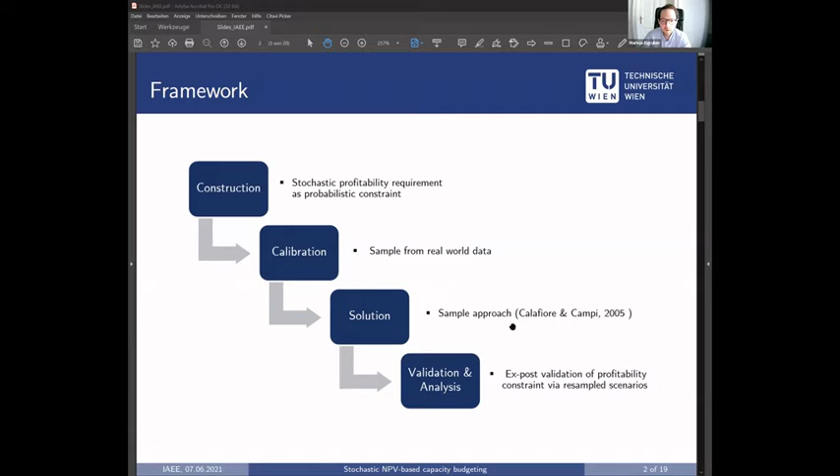So this is basically the outline of the presentation today. It closely follows the sections in the working paper as well. We are firstly constructing the model. We are then calibrating it, using real world data from an airport right close to Vienna. We're then solving the model using a sampling approach and also a constraint discard approach, using results mainly from the work of Calafiore. And in the end, I will also present some first validation of the model that we came up with up to this point.

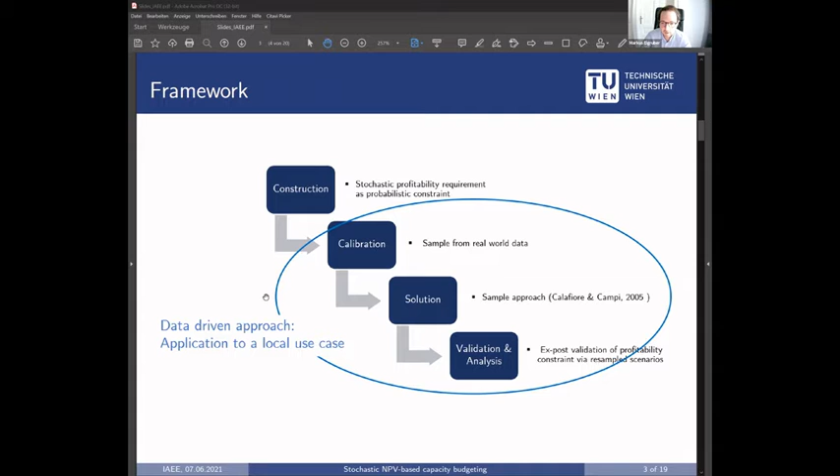And again, it is important to note that we are employing a purely data-driven approach, so we do not assume any parameters on distributions of random variables. We are just plugging in the data on wind speed and on solar irradiance, transforming them, generating output data, and then matching this with the prices at the exchange. So this is basically the overview.

So what does the model look like? We are in the context of optimal portfolio choices in energy economics. We will determine the optimal size of installed capacities. We are looking at solar and wind. So in the use case, we are determining the to-be-installed capacities of solar and wind energy. These form the costs of the investments, and these costs need to be minimized.

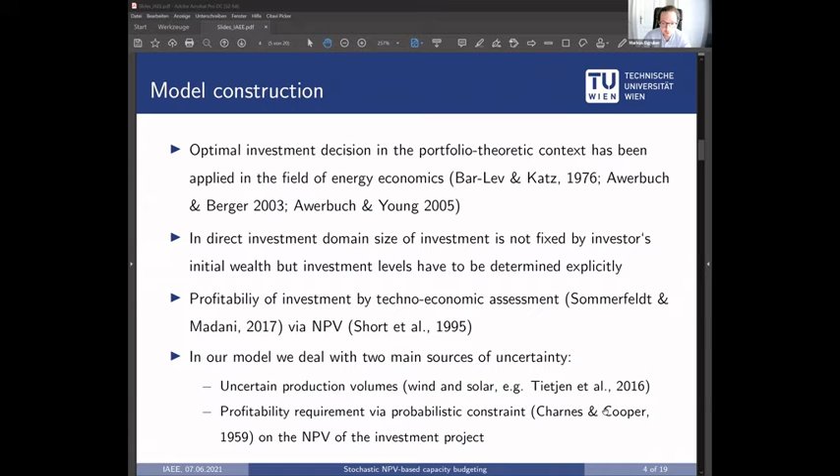Given, and this is the main crux of this working paper, a set of probabilistic constraints. This is the minimum exceedance probability framework. Here at the bottom, the investor imposes a certain net present value that he or she needs to meet with a pre-specified probability. Probabilistic constraint models are also quite old, starting in the 50s, and there is quite an extensive literature on optimization in this framework and on existence and feasibility results as well. So this is why we speak of probabilistic constraints.

Of course, since we're dealing with renewables here, and renewables are intermittent, the net present value is also stochastic. This adds on prior work of my colleague Matthias Ondra in his PhD thesis, which has also recently been published.

And the most basic version of the model you can see here on the left-hand side in this box. We are minimizing the capital expenditures, where Xi is the capacity of technology i, and Ci are the costs per unit of installed capacity. This is a very simple linear objective function, and we are minimizing these investment costs subject to a set of probabilistic constraints.

And in this set we have the pre-specified probability here, which is given by chi. The investor basically says, with a probability of at least chi, I want to have a net present value, so a total discounted cash flow, right, revenue minus costs, of at least theta, right?

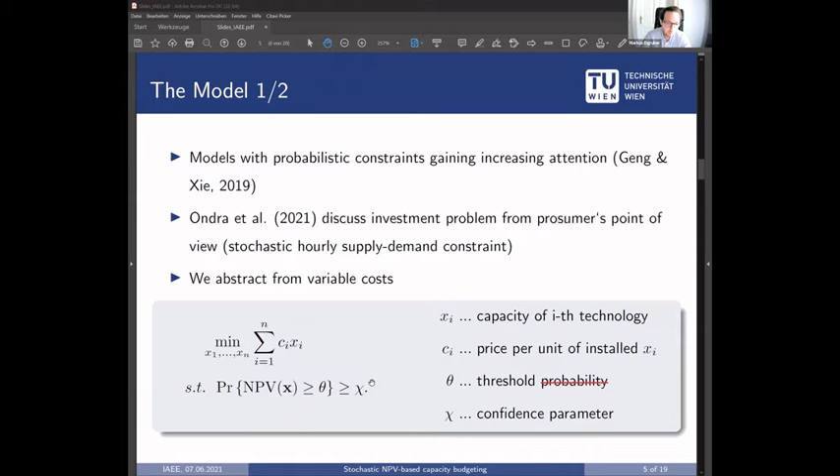So in words, and also in our use case, this can be explained by a requirement that the net present value needs to be larger or equal to, say, $1 million or euros with a given probability, right? This is where the probabilistic part comes in. And so what we need to do is actually come up with some numbers for the net present value, which is comprised of revenues minus costs.

At the top, what are the revenues? They're basically the spot market prices. We take them from a local Austrian exchange, not from the EPEX. I'm not sure about the spreads, maybe some of you are aware. Usually one takes the spot market prices from Paris, but we took them here from an Austrian exchange. We have the power, which is being generated by the capacity, and then obviously price times the power is the revenue, and we're also discounting.

We're looking at the time frame of 25 years, right? So the energy park needs to be existing for 25 years. This is the planning horizon of the investor, and we're discounting at the rate of 3% annually. And we do take local data, which we plug into these constraints, and more on that in a couple of minutes.

So we take hourly data from the airport, Wien-Schwechat, which is the main airport next to Vienna. Why do we do that? Because they have very high quality data on wind speeds. And there's also solar irradiance data at CAMS, which is publicly available, and this we also use in order to generate the power that we need to plug into the model.

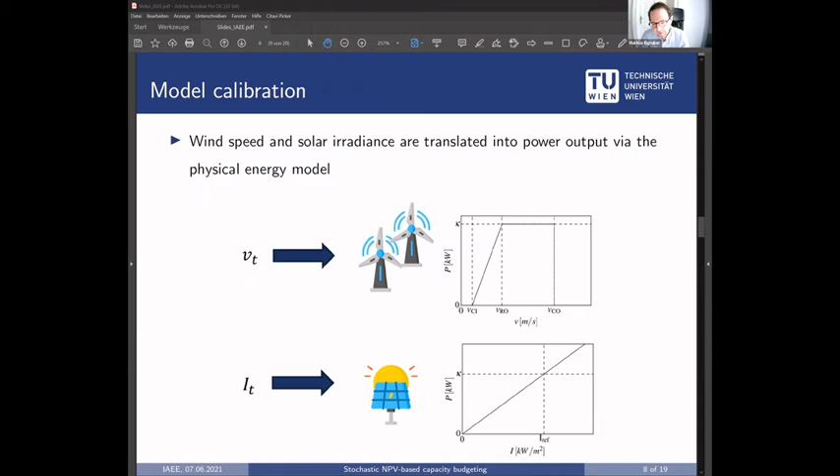And the picture is even simpler for solar panels, because we have the solar irradiance, basically the power of the sun shining on this part of Central Europe next to Vienna, and we are transforming it linearly. So the higher the irradiance levels, the more power is being generated, at least for a given efficiency level of the panel.

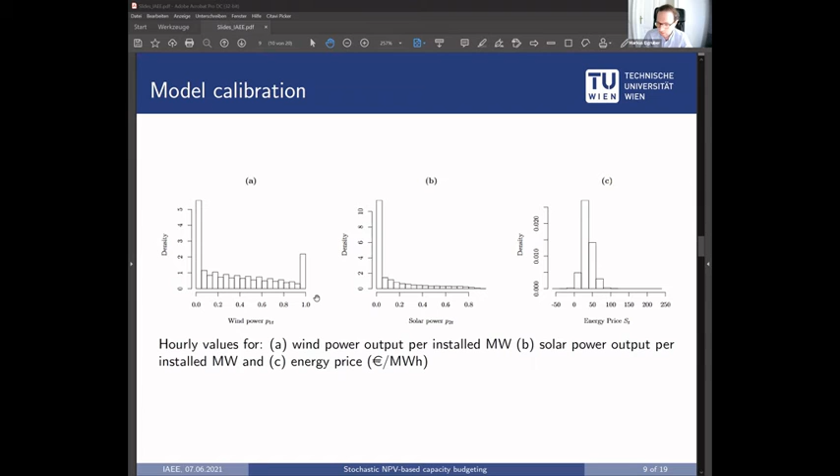And for energy prices, we basically just sample from the local exchange here in Vienna, the EXAA, the spot market prices for electricity, and we sample this data hourly. So we're dealing with quite a large sample here. We are constructing this with a scenario approach, over a time frame of 25 years.

Which is quite a large time frame, but from an investor's point of view, quite a realistic one. We are using a very particular sampling approach, namely that of Calafiore and Campi. We do have the data hourly. We randomly sample from each month 3 days. We do this 10 times for each month, such that we have a month.

We do this 12 times so that we have a year, and then we are repeating this process 25 times until we have the sample generated for 25 years. And we do this because a block size of, say, a day is too small in order to capture short-term and also longer-term weather trends and effects. Because due to the intermittency and the very short-term drastically changing weather conditions, the power output varies as well.

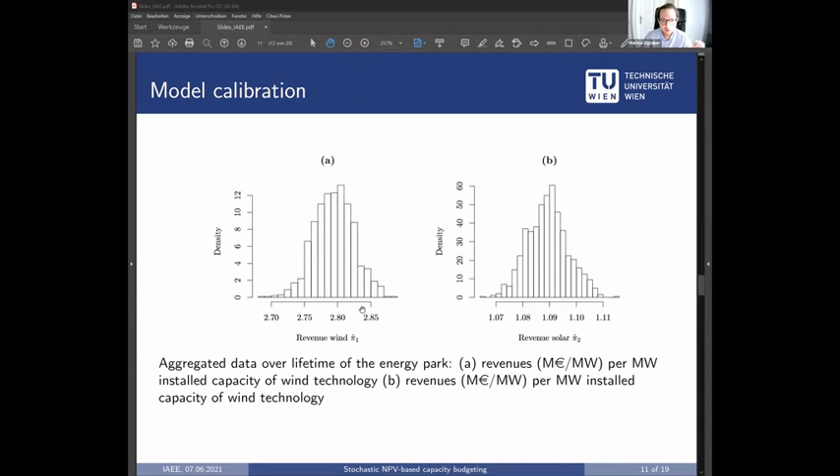So after gathering and preparing the sample, we plug them into the constraints. We are dealing with quite a lot of constraints here. They are probabilistic. So in the general model, we are dealing with 1,002 constraints. Of course, we also have non-negativity constraints on the capacities, where the costs need to be minimized. And we take the spot market prices for electricity and the production being generated from our sample.

And what is nice is that Campi, this time with Garatti, was able to show that in this framework, if the sample is approximated with this scenario method, we can omit a couple of constraints and still obtain a robustly feasible solution. The number of omittable constraints is given in their paper and also in our paper. It's not that important right now, and obviously this number depends on the parameters that we impose. But in the end, we were able to discard a couple hundred constraints and still come up with a feasible and robust solution, which is computationally speaking very advantageous.

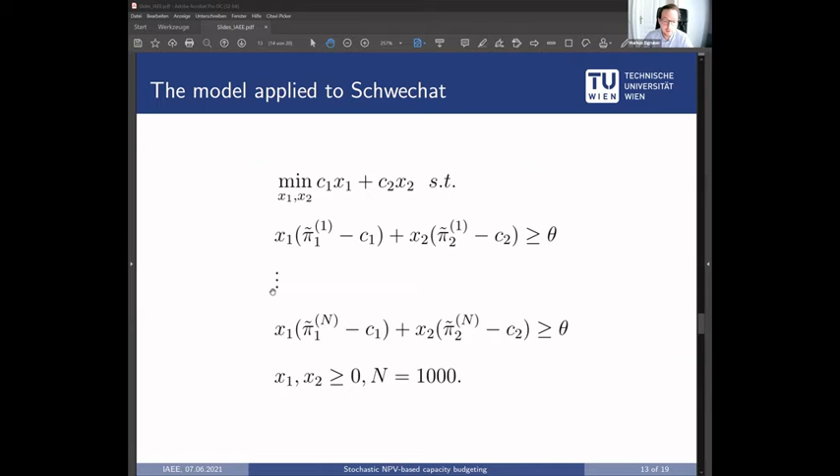So this is the general model in its basic applied form. This is the very first use case where we applied these ideas, where we have two renewable energy technologies, wind and solar. We are minimizing the capital costs of investment for these two technologies. And then we have these probabilistic constraints. Capital N is here 1,000, so we have 1,000 constraints. But again, as I've noted before, we can omit a lot of them and still come up with a good solution.

So what does the model actually put out? Here on the left-hand side, I've put two plots. The confidence parameter that the investor imposes on the net present value is critical to the ideas behind this framework. On the left-hand side, we plot for each confidence level, so there's an interval from 0 to 1 because it's a probability.

We are plotting the necessary level of investment in order to achieve the threshold of the NPV that the investor imposes. We have used a threshold in this use case of 1 million euros, with discounting over the 25-year period. And what you can see here is that this first application makes sense economically speaking. Once we increase the confidence parameter, once we require a more and more certain outcome, the costs increase. And if the investor requires an almost sure outcome, then the costs increase convexly, they basically explode. And this makes economic sense.

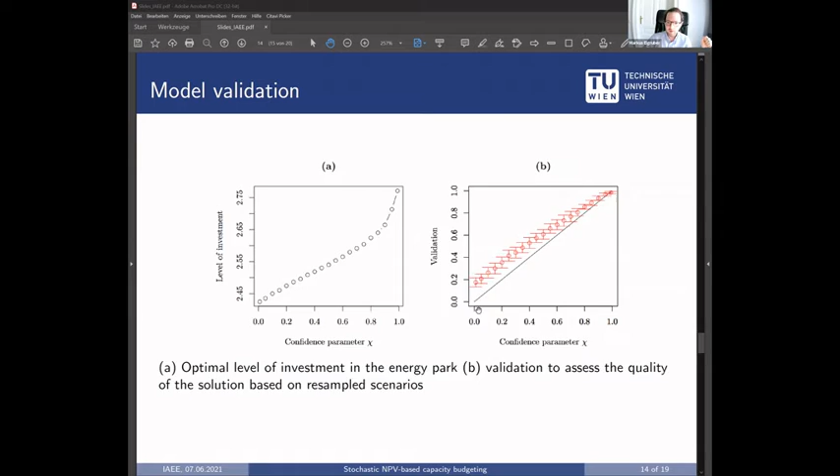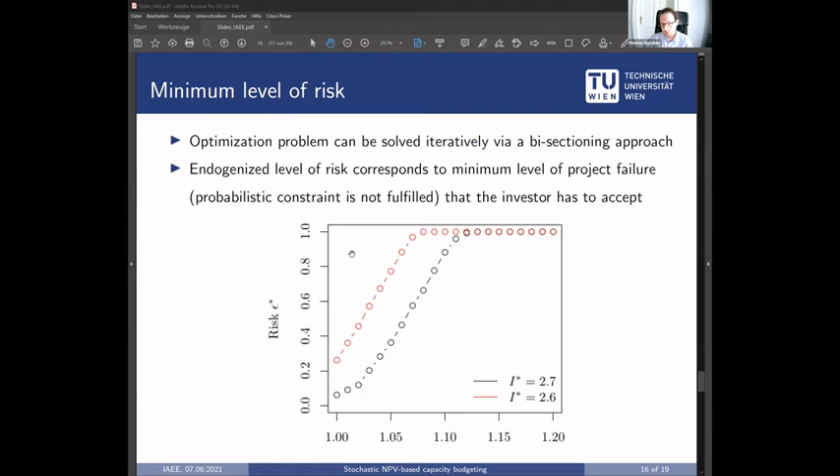So since I only have two minutes left, I will skip this part here and jump right to the conclusions. I mean, you can do many things with this framework. You can also impose a budget constraint, and then work with a budget constraint in contrast to the ideas that are explained before. Then we can speak also if we compute the inverse probability of failure, basically, right? So it's very easy to do technically to transform this model in such a way.

So what I've presented here are the results of a very recent working paper. We have applied this now, as I've said, to the use case in Schwechat in Vienna, with the local data here. We are obviously trying to improve the model, to make also the algorithm more efficient, and to also find use cases where we can apply this model and maybe generate interesting insights. So this is research which is still at an early stage, I would say, and we are of course open and ready for criticism and for ideas on how we can improve the model further, right?

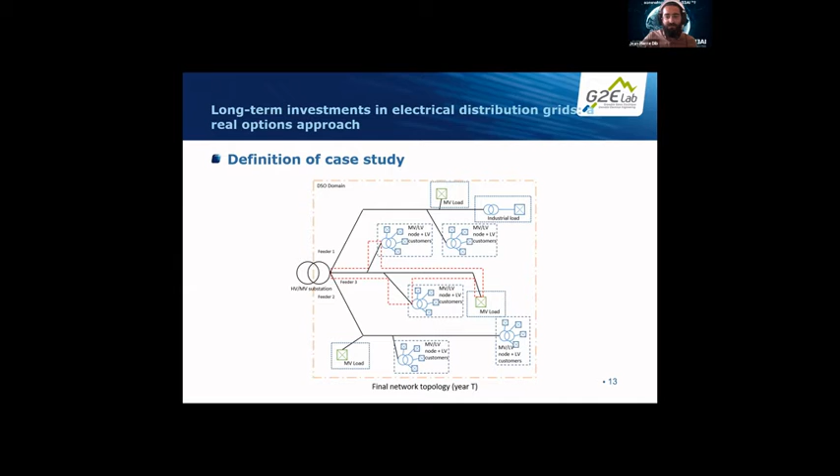First of all, we define the case study as an HV-MV substation which already has two feeders connected to it. We suppose that the DSO has already optimized the grid technically by adding a new feeder, as shown in this figure here, and this addition helps reduce power losses, non-distributed energy and power outages. So the DSO looks on the savings made from these reductions as a way to repay the capital expenditures associated with the installation of a new feeder and lines.

In this slide, we show the source of uncertainty in our model, which is related to the maximal evolution of the load power yearly. So we take the maximal power of each year, and we have chosen this variable because the DSO models their yearly cost based on this variable. So to have a comparative analysis between the existing models and the model we propose, we have chosen this variable.

We chose this variable to evolve following increments of a geometric Brownian motion. We have made this choice because it is analytically easier to model this type of stochastic process as a first model, and also due to its similarities with the maximum yearly power variation. To show these similarities, we show the simulated geometric Brownian motion on the left, with a deterministic trend line, we can call it, in the middle that shows the deterministic possible evolution.

And on the right, we have modeled the data obtained from RTE open data to demonstrate the similarity between the behavior of the real load and the models we propose. Also, the geometric Brownian motion allows for the simulation of cases where the evolution of the load might exceed the expectations of evolution, or it might not reach them.

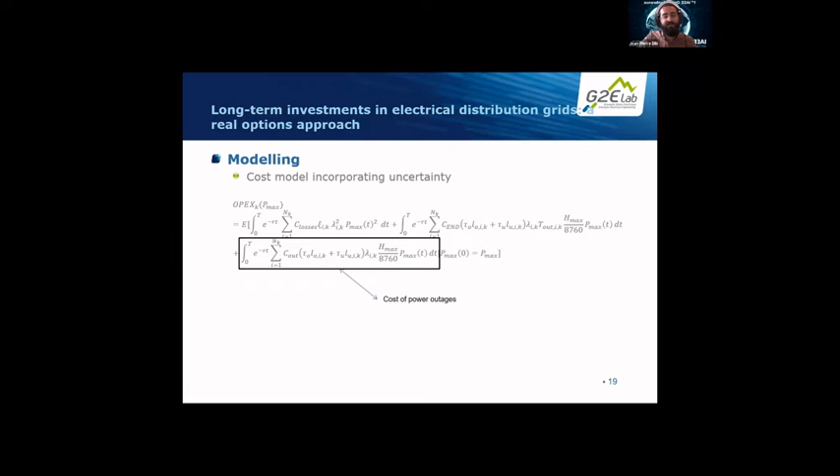Developing the expected value yields a second order polynomial in our stochastic variable. Thus, we can write the operational expenditures as we can see here. K designates without reinforcement or with reinforcement to designate the different OPEX, while I designates the feeder for which we are calculating these costs. Of course, it's the sum of all the costs on all the lines.

While the operational expenditures depend naturally on the evolution of the maximal power, we consider the capital expenditures associated with the power lines installation and purchase as independent from that value, and that the installed capacity can accommodate any level of power that might be reached. We have done this simplification to reduce the amount of constraints we have on the calculations. Of course, we are adding it with future models.

Then we introduce the option value in the cost model, and we consider that the threshold splits our domain in two. On the left of the threshold, continuation is optimal, and to the right, investment is. So on the left, we continue with our two feeder model, and on the right, we invest in another feeder. K here, we replaced it with WR and R for without reinforcement and with reinforcement, respectively.

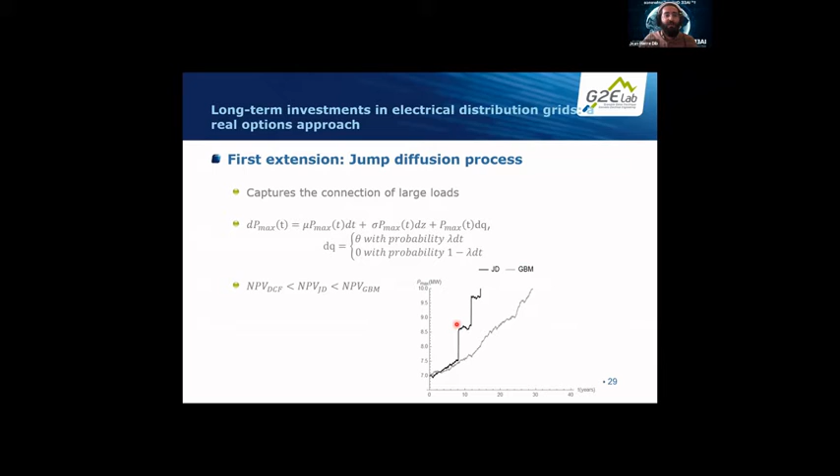Redefining this stochastic variable, we proceed in the same fashion as described earlier. And we determined that the investment trigger values for the jump diffusion and geometric Brownian motion are both larger than discounted cash flows analysis, and that the present value when the load is considered as a geometric Brownian motion is the largest of all three, because the geometric Brownian motion incites the decision maker to wait more time, because the power is less likely to increase as fast as a jump diffusion process, so it incites the decision maker to wait longer.

As a second extension to our model, we considered that part of the load growth is fueled by the addition of electric vehicles, and a part of these electric vehicles is participating in load shedding and peak shaving contracts. We consider that there is no additional cost incurred by the triggering of this.

Jean-Pierre, you have about 2 minutes. Yes, I'm almost done.

This means that the real drift rate of the stochastic variable is less than we expect. In addition, we assume that the flexibility provided by these vehicles is accessible at all times and is activated directly upon the DSO's request. As I mentioned earlier, there's no additional cost. We have made this assumption to simplify our case study, seeing that our goal is to present the utility of real options and the effects of the type of uncertainty on the decision's flexibility.

We can deduce from the graph a few things. First, the edges of each area denote the minimum EV integration needed for the DSO to avoid investment. So, for example, when using a jump diffusion process and for a drift rate of 1.2%, if more than 54% of that drift rate participates in load shedding and peak shaving, the DSO can avoid any investment altogether.

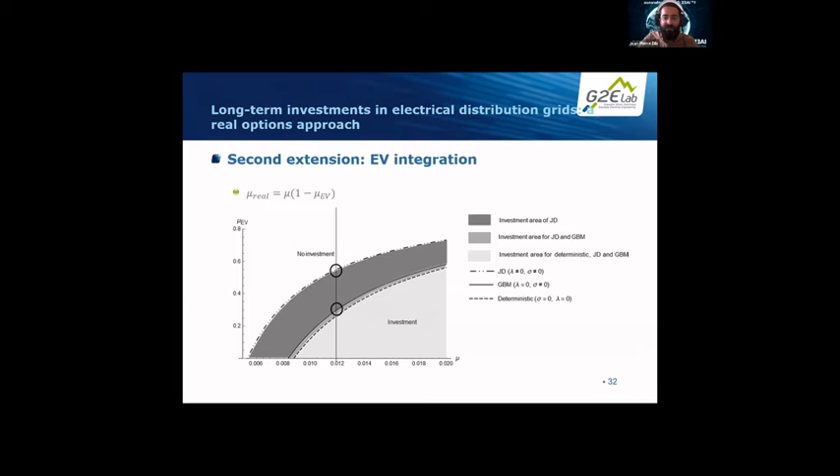Second, the minimum values when using jump diffusion model are higher than those for geometric Brownian motion. In this context, the DSO is more willing to invest in network reinforcement if they expect sudden load jumps than if they don't, meaning that they need more flexibility on the network to avoid investment. Currently, we are working on a cost model incorporating demand response in the analytical context, and we are going to be looking for similar case studies.

So as a conclusion, we complement the existing literature by adding to it a continuous time analytical model, because the existing literature for distribution network investment uses Monte Carlo simulations and discrete binomial lattices, which have their own problems. Of course, we don't say that the analytical result does not have any problems. We propose a dynamic tool that includes uncertainty and reflects decision-making flexibility. And we determine an optimal investment strategy by determining optimal thresholds for the load power and expected investment timing.

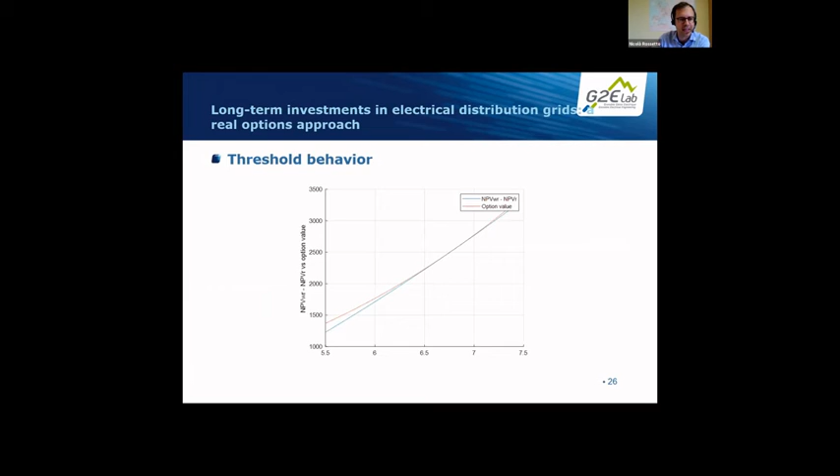Thank you. Are there any other questions? Maybe on my side, thank you, Jean-Pierre. Maybe I didn't notice in the description of the mathematics of the model, but did you consider the possibility of a feedback between the demand for electricity or capacity on your network and the investment by the distribution company? Because if the distribution company invests, and by simply investing fosters demand growth, maybe the assessment of the value to wait changes. Do you consider this effect or not?

Normally, the investment decision of the DSO comes if they think that they might see some constraints appear on the grid. The constraints, until now, without the introduction of large DER capacities or electric vehicles or the new flexibility contracts, have been based on whether or not the load is going to grow or whether or not the equipment has reached deterioration in their physical components.

So the DSO's framework is very specific because it treats low voltage consumers, which are residential and office spaces and stuff like that. So it's low power, and there is no such feedback loop. The DSO will react to an electrification demand where, for example, a customer builds a house in a remote area and then asks the DSO to supply them with electricity. Or in a residential area, you have a building complex that is emptied and torn down, then you have a decrease in consumption. That way, the DSO does not need to invest in larger infrastructure.

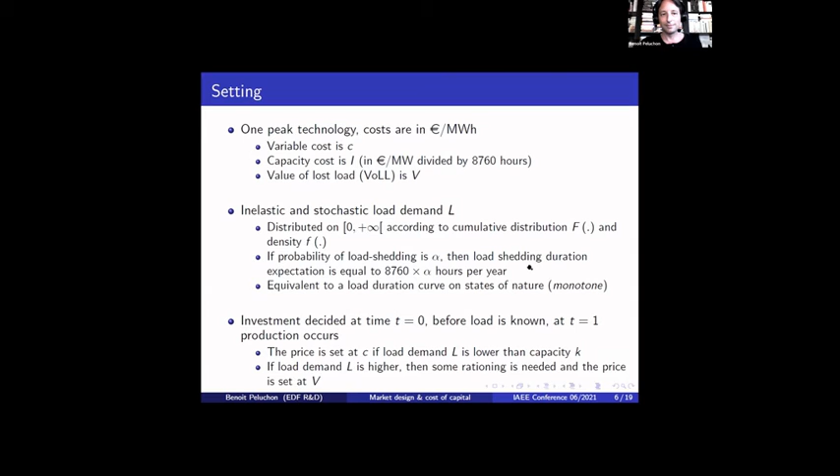If you look at how to express the investment decision, you have to look at the returns for the investment. So if you look at 1 unit of capacity, you get a gross margin pi equal to a random variable that is simply the difference between the value of lost load and the variable cost times an indicator function that depends on whether load demand is greater or lower than installed capacity, and eventually a capacity price. And this is a gross margin expression. This is a random variable, and you just have to divide it by the investment cost to get the random variable that is the return of the investment.

And if you take the expectation, you get a very easy expression that is simply the difference between the value of lost load and the variable cost times the probability that load demand is greater than installed capacity divided by the investment cost. And if you link that to the CAPM, we know that you have to compute the beta of expected return to the financial markets returns. So I have written the usual expression for the CAPM, and I will assume that all the random variables belong to a probability space L2. And I will make one adjustment, that the CAPM equation can be written in cash flows. And this will help to solve the optimal capacity investment.

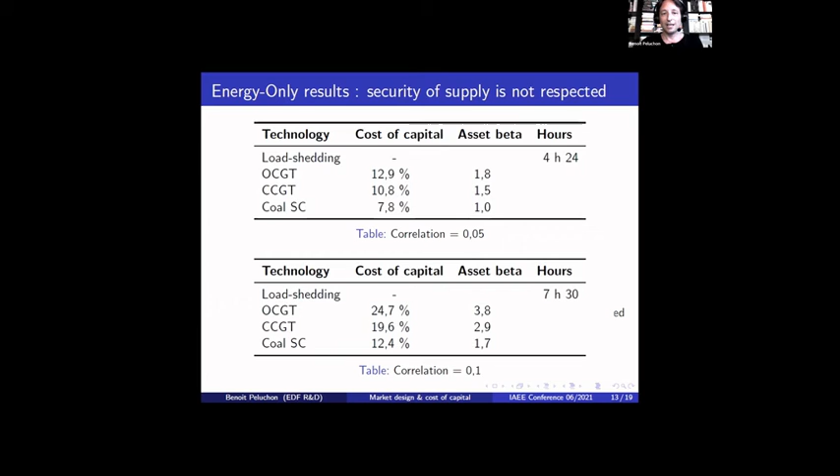If I look at the capacity market, one thing to have in mind is that I have only assessed the impact of a constant and certain capacity price for the whole lifetime of the peak technology. And the capacity price is set.

You have about 2 minutes, Benoit.

Okay. The capacity price is such that we respect the security of supply. If I look at the results, then I see a clear risk reduction for peak capacity, and I also get an expected price decrease by comparison with energy only. If I look at the contract for difference, just one thing to notice is that it's a 15-year energy CFD. Then I get even lower cost of capital at equilibrium and lower expected price for consumers. And you can notice that the CFD does not suppress all the risk.

One point is that a lower cost of capital can be welfare improving, and that is something that is not studied in itself in the work, but for that you would have to use the social discount rate. And some of the papers have done it, but it is a normative approach. You have to use a utility function for representative agents. And as you can see, apparently those studies give a much lower social discount rate, meaning that lowering the cost of capital through a change of market design seems to be a welfare improving measure, as it allows more investment and it allows capacity investment to be more in line with the first best outcome.

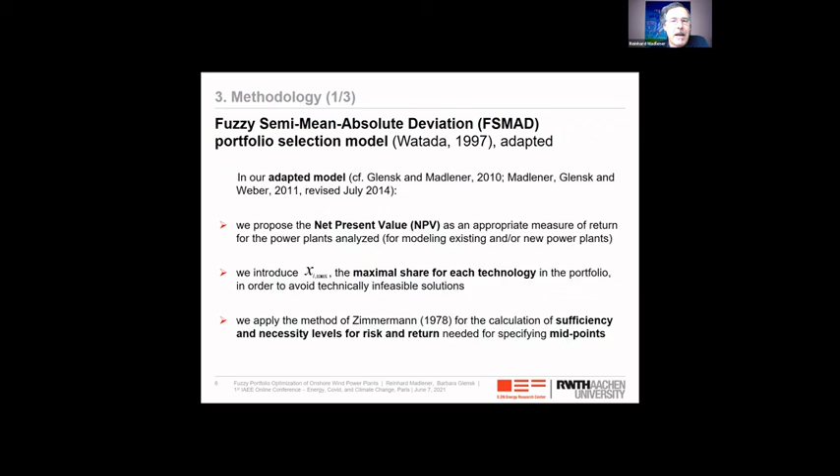So we apply Zimmermann's 1978 fuzzy sets method, and that involves the calculation also of sufficiency and necessity levels for the risk and return needed for specifying so-called midpoints. This is the problem that we look at. Capital lambda is the one that we want to maximize. This is a logarithmic transformation of lowercase lambda divided by 1 minus lowercase lambda, and lowercase lambda is the value of the membership function.

There are several alphas involved that determine the shape of the membership function, which, by the way, takes a logistic or S-shaped shape. And then we have some R's and W's. R refers to the expected returns, the W to the risk involved. And so we need to determine also this RM and WM that you can see in those equations. They are related to the necessity and sufficiency values. It's the average of those two, and that allows us to calculate these RMs and WMs.

And then we have the RIT, that's the expected return of a specific asset I in time t. All assets have shares, and all the shares together need to sum up to 100% or 1. Lambda needs to be non-negative, D needs to be non-negative, and lowercase d refers to the deviation in the return from the expected return. That's also one of those constraints that you can see on this slide.

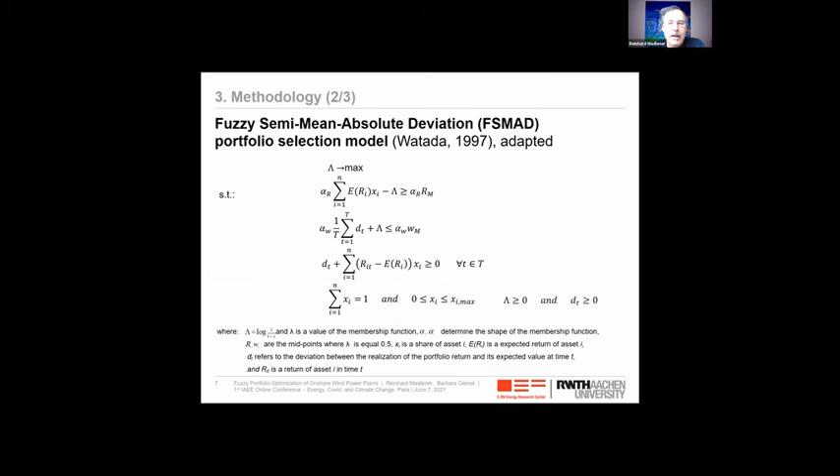This specification goes back to Watada, 1997, the first one specifying such a fuzzy semi-mean absolute deviation portfolio selection model, not in the context of energy. I think we are the first ones who are doing this in the energy context. And another work by Fang et al. in 2008 also refined the Watada specification.

Now the steps are here. We determine the net present value for each individual wind park using Monte Carlo simulation and the Crystal Ball software based on technical and economic data. I'll show you an overview of that in a moment. Step 2 is to specify the sufficiency and necessity levels for the return and risk.

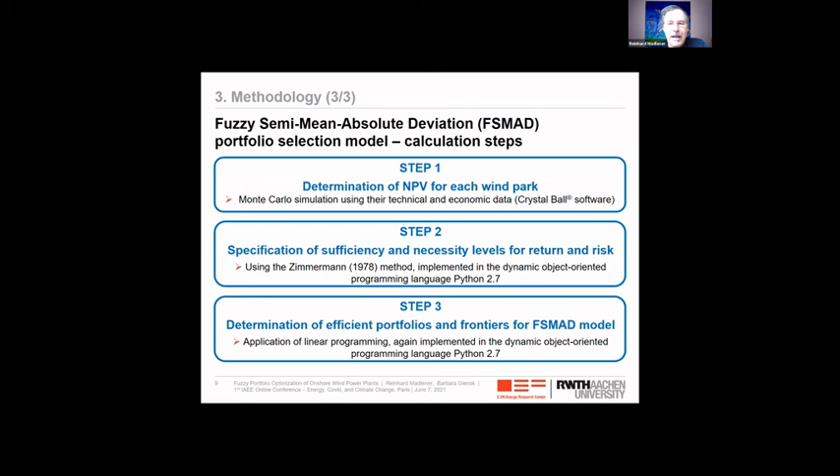Obviously this would need the involvement of the decision makers, of the experts, to shape those parameters and eventually the membership function. We just did this in an illustrative way, but in practice you would need to involve the stakeholders. And step 3 involves the determination of efficient portfolios and the frontiers for the fuzzy semi-mean absolute deviation model. One advantage of this approach, by the way, is that you can apply linear in contrast to quadratic programming. So it also simplifies the computational effort compared to the Markowitz mean variance approach.

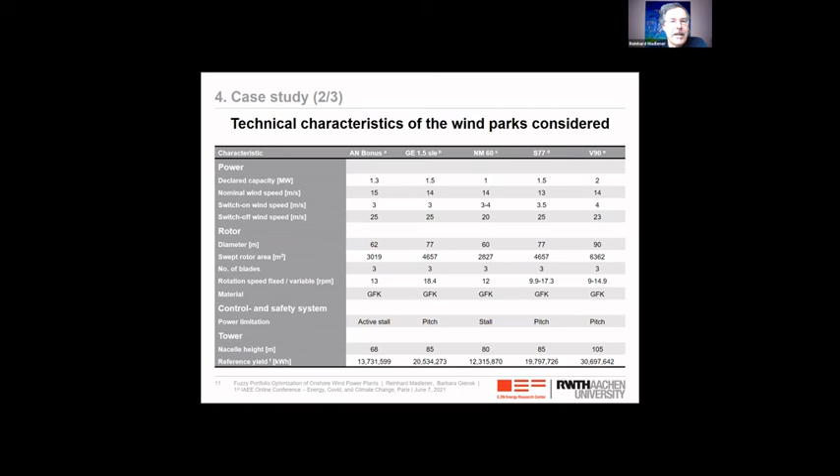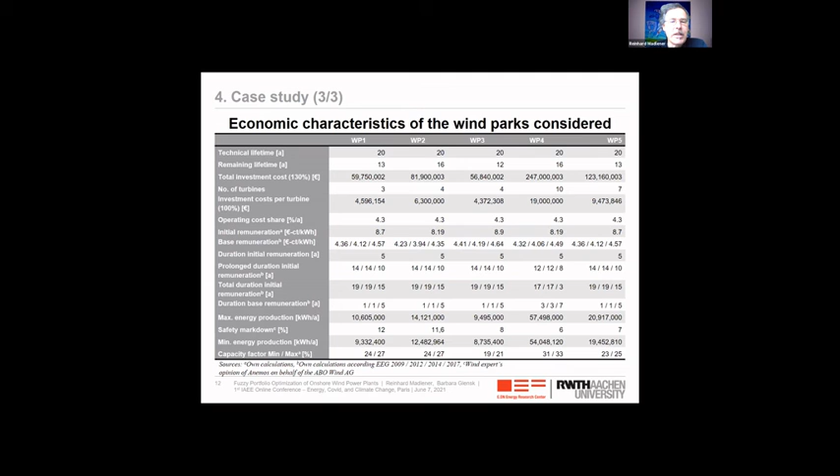That's all the same, material same, but in terms of the power limitation, they vary. Nacelle height and what we expect as reference yield varies. Economic characteristics are on this slide, where you can see technical life, remaining lifetime, and so forth. All that is important to calculate the net present value and do the cash flow simulations.

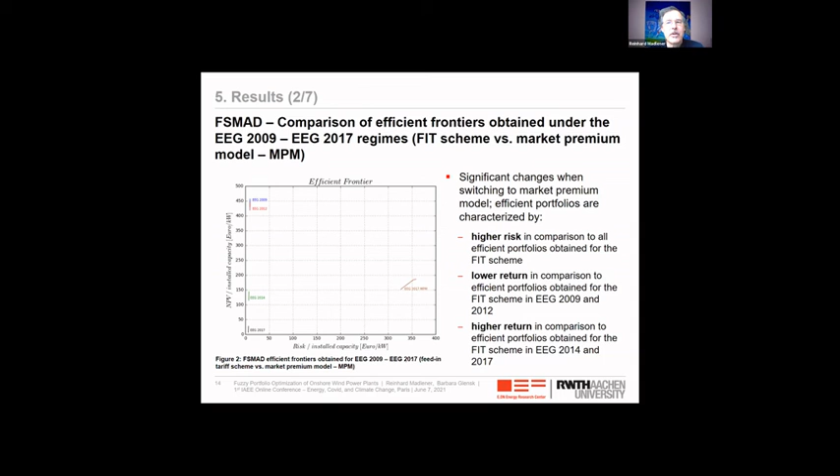On the next slide, you see a comparison between the frontiers that we get under these different regimes, now looking also into the market premium regime. This has to do with some spot price development valued over a period of a month. And then this is like a sliding markup on what operators of wind parks get. You can see this is quite distinct in the sense that it is a lower expected NPV compared to the early regimes, but a higher one compared to the later regimes, and in any case, a much higher risk that those operators or investors need to take.

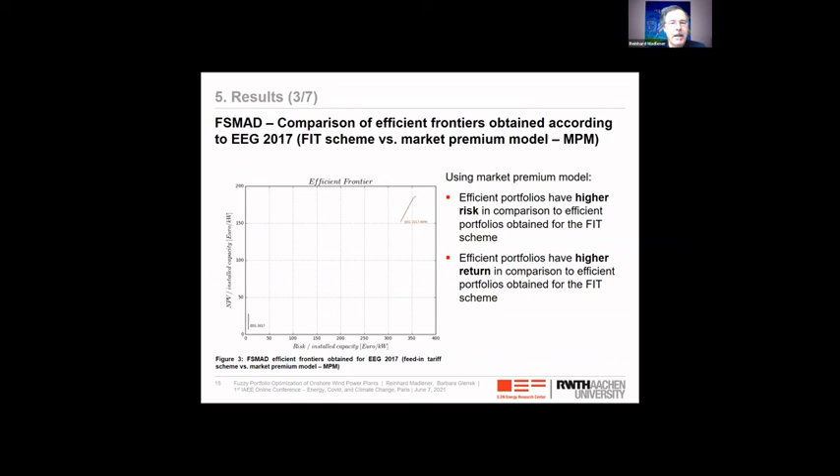Then we can look at the comparison between EEG 2017 using the feed-in tariff on the lower left-hand side of this graph versus the market premium model on this upper right-hand corner. You can see that the efficient portfolios do have a higher risk compared to the efficient portfolios that you would get under the feed-in tariff regime, and also higher returns. So it's risk and return that is affected strongly, switching from the feed-in tariff to the market premium regime within the same Renewable Energy Act 2017.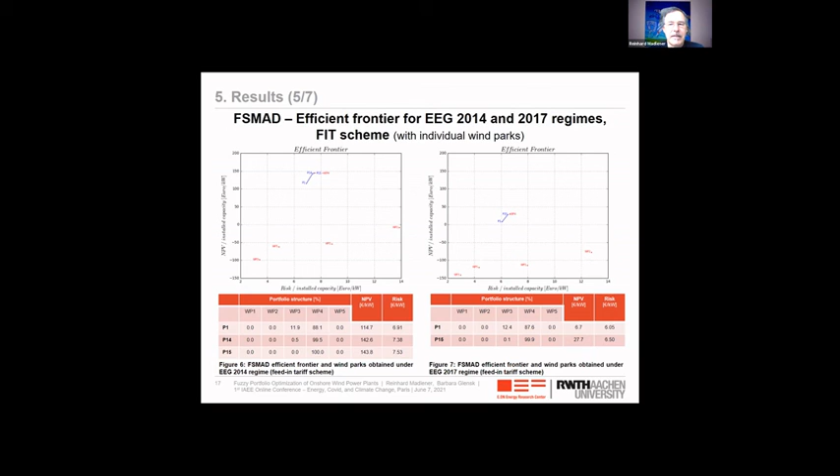Using this alternative risk measure, such as this SMAD, simplifies the calculation. That's one interesting feature, and better reflects investor real losses. In combination with fuzzy portfolio selection models, it allows to develop a new perspective on power generation selection problems.

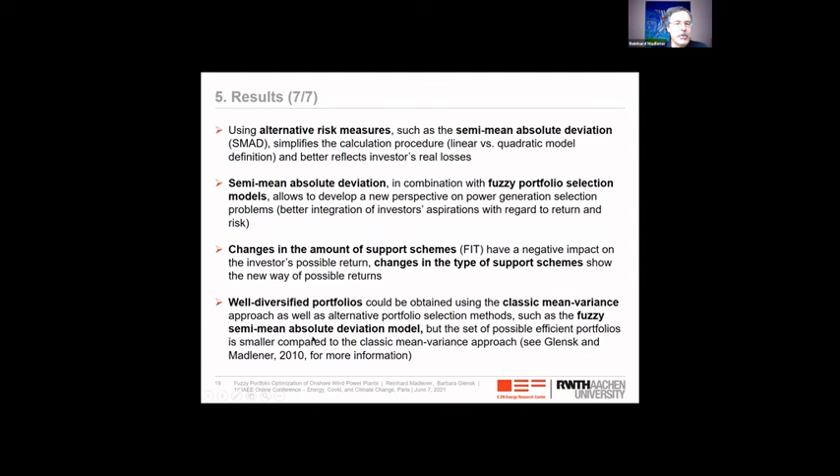I showed you that feed-in tariff support schemes have a negative impact on the investor's possible return. Changing the type of the support scheme also has quite some impact on these returns, but feed-in tariffs tend to have lower risk. And well-diversified portfolios, such as the ones you would obtain with classic mean variance approaches, as well as the alternative ones, can be used for such kind of decision making.

To conclude, how should different onshore wind parks be combined? Well, from our analysis, we find that the efficient portfolios obtained consist at maximum of 2 wind parks only out of the 5 we looked at, irrespective of the regime. Efficient portfolios with the highest return always consist of wind park 4, which is the biggest one, and 1 of 2 installed in 2007, which were the youngest ones we looked at.

And how useful is fuzzy theory for portfolio selection? Well, we showed this as a promising approach where investor risk and return expectations can be incorporated into the model, positively affecting the decision maker's problem in the sense of a smaller set of decision alternatives to be considered.

And thirdly, what's the impact of regulatory change? Well, the changes in the regulated promotion scheme have a significant impact on the portfolio characteristics, but less so on the portfolio structure. Finally, regulatory change, especially the EEG 2017 amendment, brings new opportunities for business decisions regarding the form of participation in the energy market.

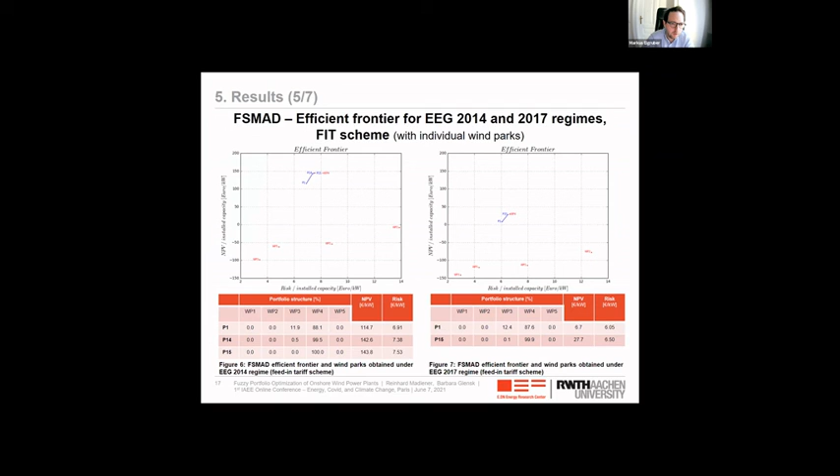Thank you very much for the presentation. So I did not 100% get the technology shares of the portfolio, basically. So these 5 wind parks, are these the 5 biggest ones in Germany? No, not at all. We just got a data set. We tried to collect data on specific wind parks, and that's what we found.

And what's the intuition that 3 of those 5 are not in the optimal portfolio? Are they just too old of a technology? Yeah, that could be one reason. I mean, it's kind of an arbitrary selection of turbines. And what we thought of is, why not look at the 5 locations using each technology? This is technology and location together as pairs. And that's just the setup we have.

And we look at, does this make an efficient portfolio, and what are the individual shares of the technologies? And we find that 3 out of 5 are apparently not useful for an efficient portfolio. You like to mix 3 and 4, and 4 dominates, which would lead to the question, how can you achieve a 90% portfolio share of wind park 4 and the 9% portfolio share of wind park 3? So what we could imagine is that you want to build 8 or 9 additional wind parks 4 in Saxony-Anhalt. That's the only interpretation that I can come up with to make this analysis useful in practice.